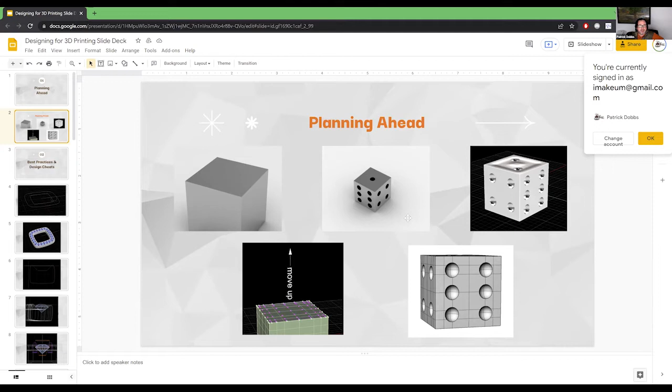So there you have it on the die that I was showing here. That's just a really good example of having to design a flat surface. I don't know that I've ever designed a die like that, but as long as you have that mindset moving forward, let's look at

possibly doing something like for a halo. Again, it's the same kind of thought process. I would start with a profile and make the profile underneath just slightly arched. Once this is created, you'll end up having to only support in one area instead of all the way across. You end up with overhangs trying to deal with your flat surfaces that end up creating issues after it's cast, and you'll have a lot of cleaning up where those supports were.

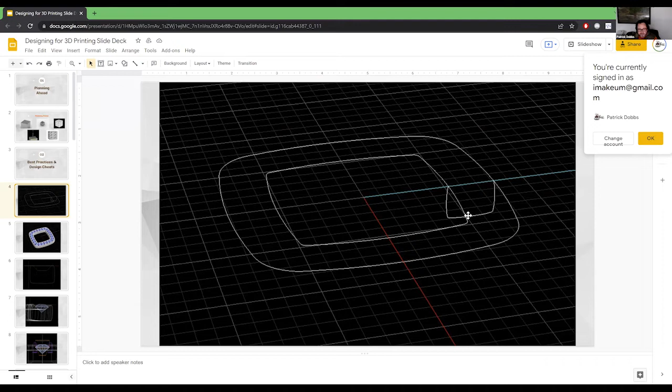So basically what we're looking at here is a halo that I just drew up as an example. So let's look at the profile - if you look here, I designed it with that arch like I was talking about.

Moving forward, this is also a bit of a design trick: if you take that profile and angle it slightly to the outside, so your diamond tables, once it's designed and they're put in place, you won't have the issue of all the diamonds trying to flash their tables at the same time when you're looking directly from above. So this is just a little bit of a cheat.

If you make it where all the tables are flashing exactly straight up, if there's any error in the stone setting, it'll always show up. So if you just move them slightly to the outside like that, it not only helps with the 3D printing, but it helps with the stone setting later on, and it's easier to cover up your mistakes. And I make lots of mistakes. That's one of the things I've done for a long time, and it helps not only with the 3D printing, but also with the final product.

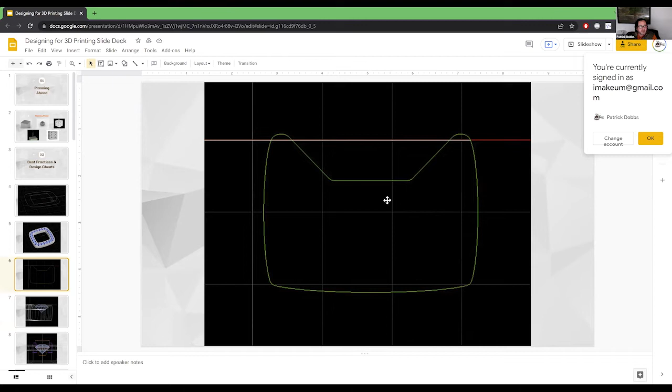So looking back, this is the profile that I used - all I did was angle this slightly to the outside before I swept it.

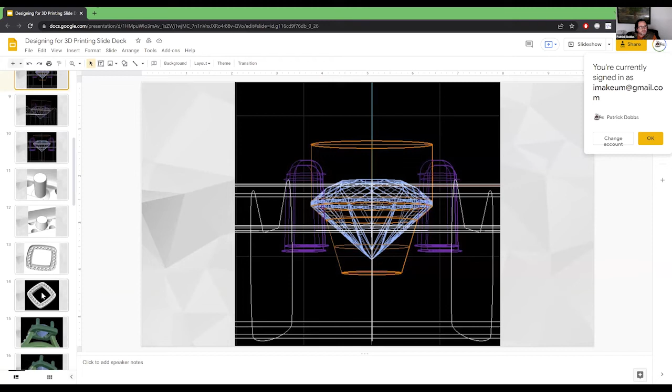And then I want to talk about the cutters that you use. What ends up happening is if you use a cutter with very straight and sharp angles, once that's invested and then burned out, you end up with these little sharp mountains in your investment. If you think about the investment, it's a lot like chalk. So a lot of times, if I'm curious how something's going to look, I'll actually boolean it out and look at the empty cavity inside of where the investment is, once it's burned out, because this would be the channel that the metal flows through.

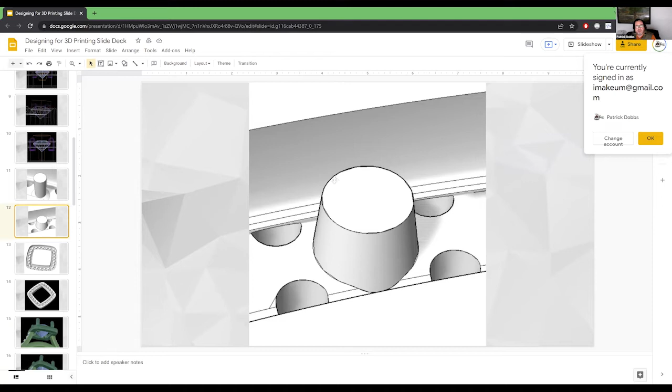So you don't want to use really, really sharp cutters and things like that. There are several different ways of doing it - I found that if you use a cutter like this, it works pretty well. You can also take a sphere and snap it to the culet so that it'd be round right here. That does a lot of the same thing, so you don't end up with a completely sharp edge. Any edges that you can round up, it's going to give you a much better print, and also a better casting after it's invested.

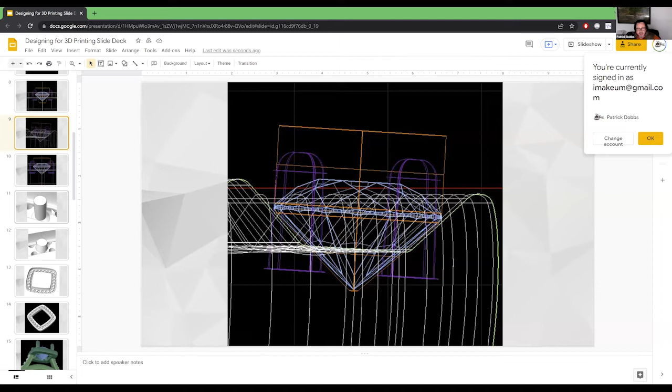I avoid, as much as possible, having pilot holes that are drilled all the way through in the 3D print, and that's for several reasons. If you're looking at this, this is what it looks like inside the investment once the ring is burned out. You're going to have the metal rushing through here, and these little pilot holes end up being little tiny pillars that are basically a lot like chalk. That metal's coming in with quite a bit of force, and it breaks those off, and then you end up with investment inclusions in your casting, and you end up looking at it going, why do I have this strange looking hole right here in my casting?

You need to figure out and learn how to identify your different types of porosity and what's caused it. You may think this is porosity caused by shrinkage, or porosity caused by expansion. But whenever you see a geometric shape that's porosity in your casting, you can pretty much guarantee you had a piece of investment break off in the casting.

To avoid that, I don't have any pilot holes in anything that I'm doing. If you are going to have pilot holes, I try to make them at least 0.65 millimeters, and you don't want that to span very far. So it's just something to be mindful about when you're designing, when you're creating something. Try to figure out the best strategies.

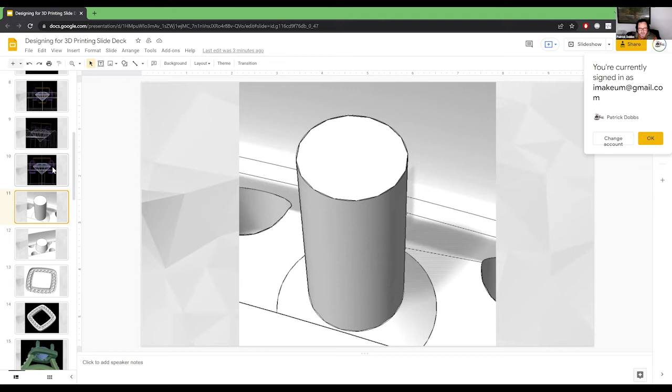This would be a really good example of what this halo would look like when it was burned out. You can tell we've got pretty solid places where the pilot holes would be, and they're little recesses under where the culet is. That way, once it's cast, you can drill those out, and they're clearly marked. So even if you decide not to drill it out, you have plenty of space under your diamond for cleaning, and also with stone setting, you don't want that culet hitting the bottom and altering the angle of how the stone is set.

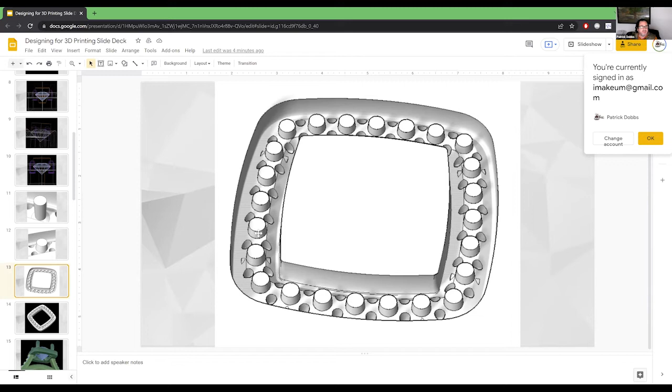So again, this is how I would draw it, again keeping soft edges and no real hard points or anything that can be knocked off during the casting process.

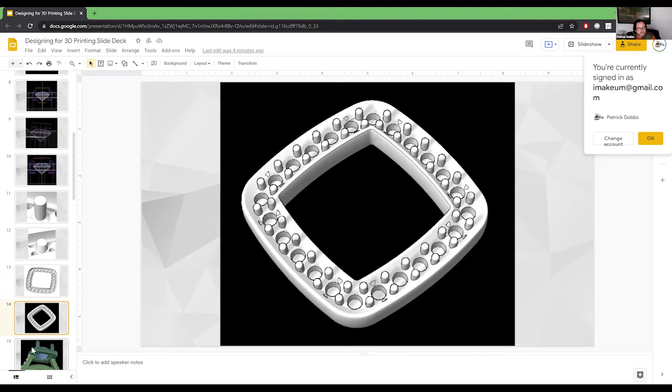Okay, so here's the ring with the halo on top. And again, you hear this all the time - it's like, well, you should never cast prongs. If you do cast prongs, and if you've done the prongs similar to this, what you'll see is you'll have a little island down here when it goes to print, and you'd have to add a support right here.

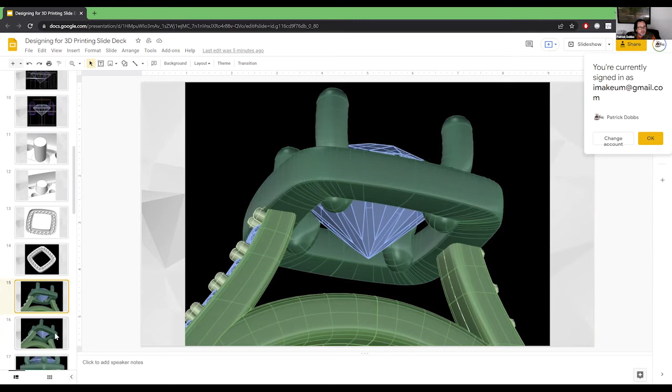Well, those supports end up being inside the design and difficult to remove. So if you were strategizing, you would want to tuck your prongs in similar to this, and then you've eliminated that need for support going directly to that prong.

It doesn't seem like a lot, just a few minutes here and there. But if you're making one of something, removing 2 or 3 or 4 extra supports isn't that big of a deal. If you're making 10 of something, it ends up costing you quite a lot of time. So you end up trying to design with these strategies in mind, and you'll save yourself a lot of time and labor, a lot of cleanup.

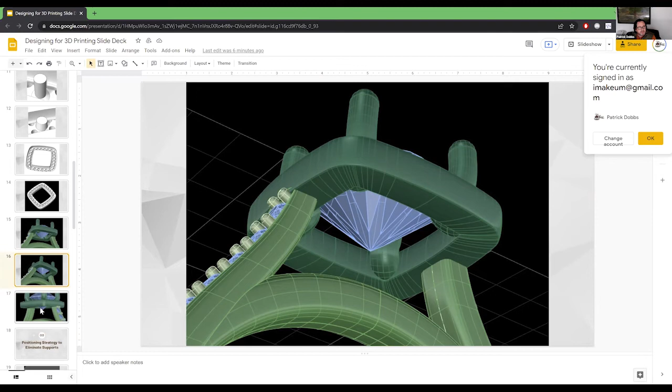If you notice, the bottom of the halo is slightly domed, so you'd only have to add supports along this edge. That ends up saving you a whole bunch of time, because that's a difficult area to get in and polish once it's cast. So you can kind of see another angle here of how you might want to go about doing that - again, you just need supports to the outer edge and not necessarily up underneath, and it just ends up being quite a time saver there.

Okay, so let's look at positioning strategy. And this is just something to kind of think about. Once the piece is designed and you're importing it in, getting ready to slice, I'll take a surface and just draw a surface in the CAD software, and then move this surface up and down and look at it from underneath, because these are going to be the areas where you need to put supports. So you may look at it and go, that's fine, I can put supports all around this outside

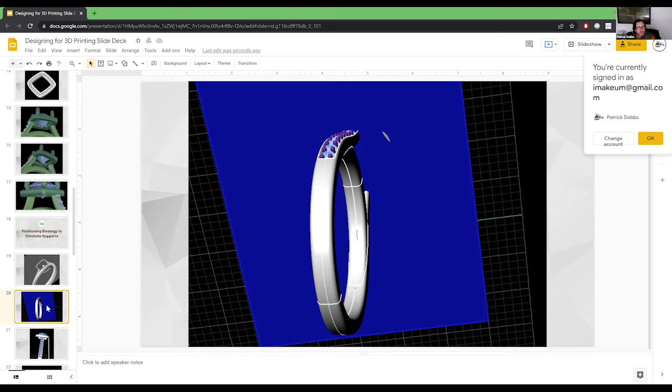edge here. Or if you slightly angle the ring, you'd only have basically one area where you would need to put a support. So you can just rotate it and then slightly angle it, and you're going to end up having to put a support here at the bottom and one there, and maybe just a couple more to help hold it in place.

But if you use this trick of just putting a surface in there, you can move it up and down, and like I said, you can look at it from underneath, and then you can easily tell where you're going to need supports once you've imported it into the B9 software.

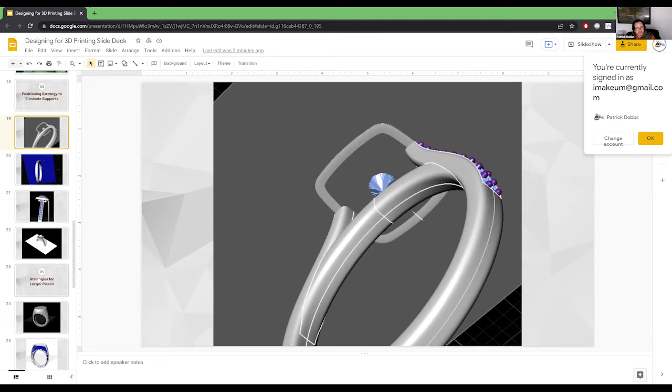Okay, so this is an interesting concept. I had this problem a while back. I had to cast a very large ring that had a great deal of detail here on top, and it was actually like a Porsche logo on top. If anyone's ever seen that logo, you know there's a lot of detail in it. And then trying to make something that would burn out clean and also have the detail in the print.

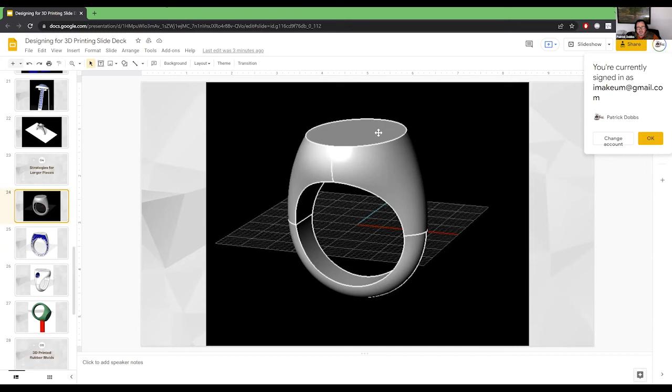So I printed it in emerald green, and we cast this thing, I bet 10 or 15 times. Trying to come up with a strategy to make sure that it would burn out clean was really, really difficult, because you're talking about burning out a tremendous amount of resin. And the process that I came up with that worked really well was I designed it with this lattice work on the inside.

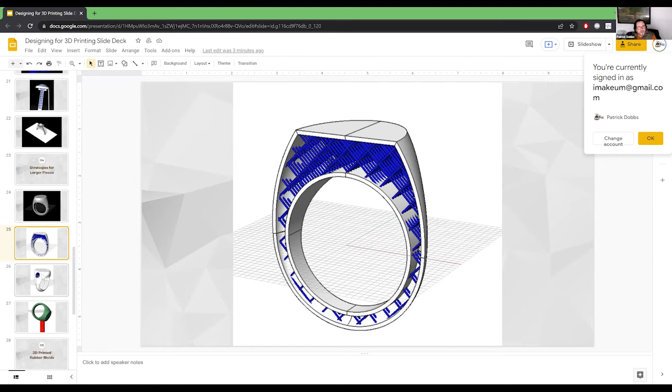So I basically designed and printed the ring hollow with supports built in. And the reason I did that is because we won't be burning out near as much resin as if you're burning out something that's completely solid. So what we ended up doing is printing it just like so. That left us an area here for the resin to drain out of, and this will also be where we ended up adding the sprue in wax once it was printed.

In doing so, we ended up spruing it just like this, and we're talking about something now that'll burn out a lot cleaner than having something that's completely solid and full of resin. So the way this works is you add a wax sprue to it and make sure that it's sealed all the way around, because you don't want any investment getting inside of the ring.

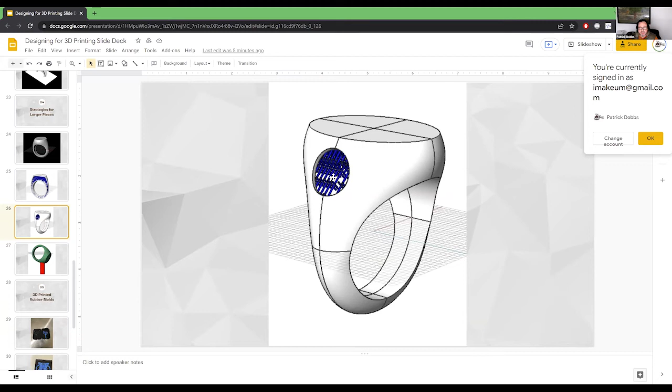When you go to invest this, you can't vacuum it, because the vacuum process will suck investment into the interior of the ring. So the best way to do that is create some investment, vacuum it, remove the bubbles, get everything really clean and well mixed, and then take your sprued up piece and just dip it in that investment and build up a coating, a thin layer of investment.

You can let that dry a little bit and then dip it again, and that way that'll prevent you from having bubbles when you actually invest it without vacuum. Once this is done, all you really have to do is burn it out with the traditional burnout schedule. Your sprue is going to burn out first, which is wax, and then that's going to expose the interior of the ring to oxygen during the burnout process, and so the ring will burn out a lot faster and a lot cleaner.

So you can do this with anything that's large. You just have to kind of have a strategy while you're doing it. Larger bracelets, larger gents rings, anything like that. I do it this way from now on, and you just don't have any of the issues with expansion, any of the issues with ash or anything like that, because you've eliminated 90% of the resin.

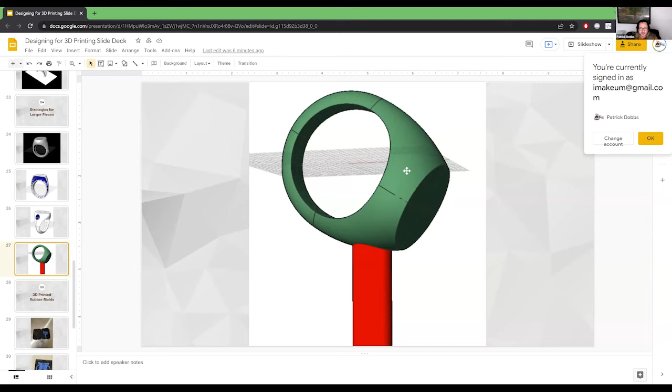Okay, so here's another interesting concept, and if anyone's ever watched any of my other webinars, we've talked about this quite a lot. Sometimes you end up with something that is difficult to print, and let's look at this. This piece here, we had all of this scroll work.

And if you look at that, there's no good way to add supports to that to actually get it printed. You'd have supports everywhere, and there'd be supports that, once it's cast, you'd have to take off. And with those supports, you're talking about a lot of labor cleaning up the casting and cleaning up where those supports were. So we've developed this process of 3D printing rubber molds, and this works really, really well.

It was one of the things that whenever you have a concept in your head about something, you think, well, I wonder if this will work. This actually worked the very first time I tried it, and it worked really, really well. And it was just kind of shocking how easily and how beneficial this is to manufacturing.